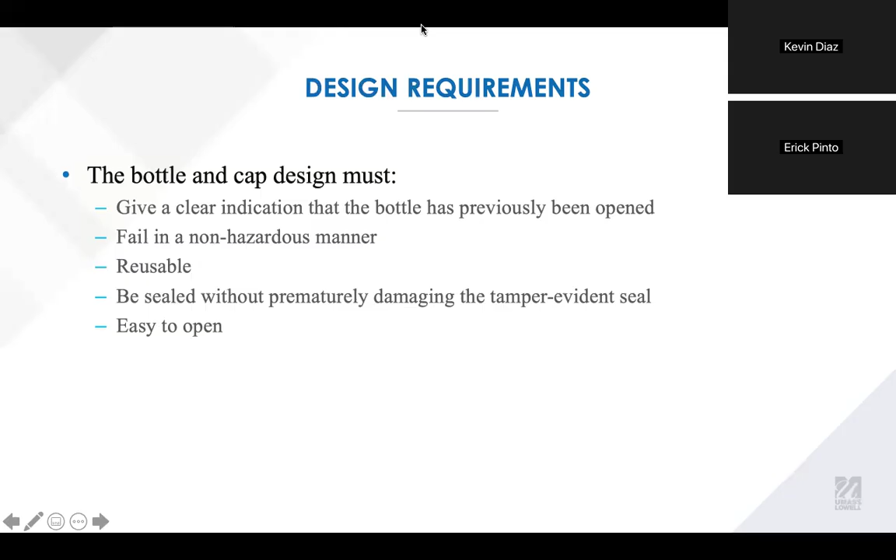Yeah, so for our engineering considerations, we wanted the bracket to fail in a brittle manner. We didn't want it to be ductile and have it deform before breaking. We just wanted a fast and clean break. So brittle materials and brittle failure would achieve that.

And we considered how it was going to break, and we figured out that having it fail by twisting would be easier for the user to open the bottle. It also prevents a lot of minor forces that could be exerted on the bracket from breaking it prematurely. And we used stress concentrations to figure out where the break would happen, so just to isolate it, basically.

And we considered how we were going to manufacture it. For prototyping, we chose 3D printing just to be able to correct the designs and go through prototypes really fast. And later we'll probably use blow molding for mass production.

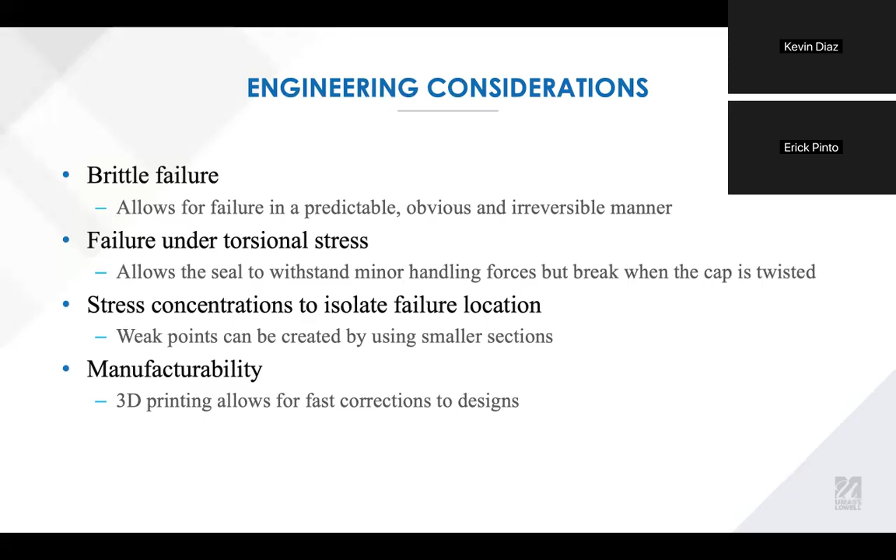For the proposed design concept, we decided to prototype a portion of the bottle, which is the body with the thread and the cap. The cap is made of a ratchet wheel, and the body has an attached bracket. The idea is the cap is gonna turn and it's gonna activate the bracket, twisting it until it breaks, as my partner said before.

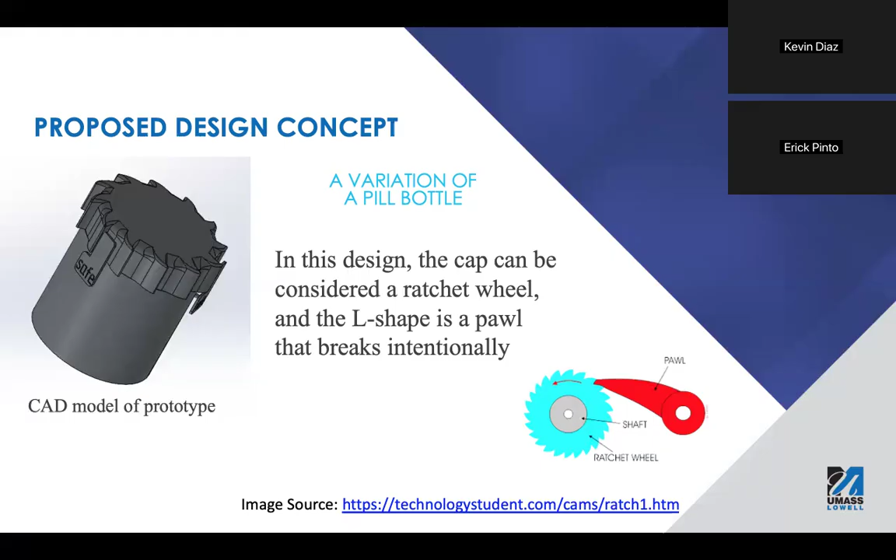That's our proposed design, as you can see in the picture. And the main concept is the ratchet with an L shape. Yeah, this is the engineering drawing. The cap is essentially a gear, and there's a little bracket connected that has the word safe on it. So when that breaks, it'll indicate that it has been opened before.

And right here, that's where the bracket connects to the bottle, and the connection between the little connector to the bottle and the bracket is where the failure will occur, because it's a smaller section. It tapers off a little bit, just to make sure it breaks off cleanly. Yeah.

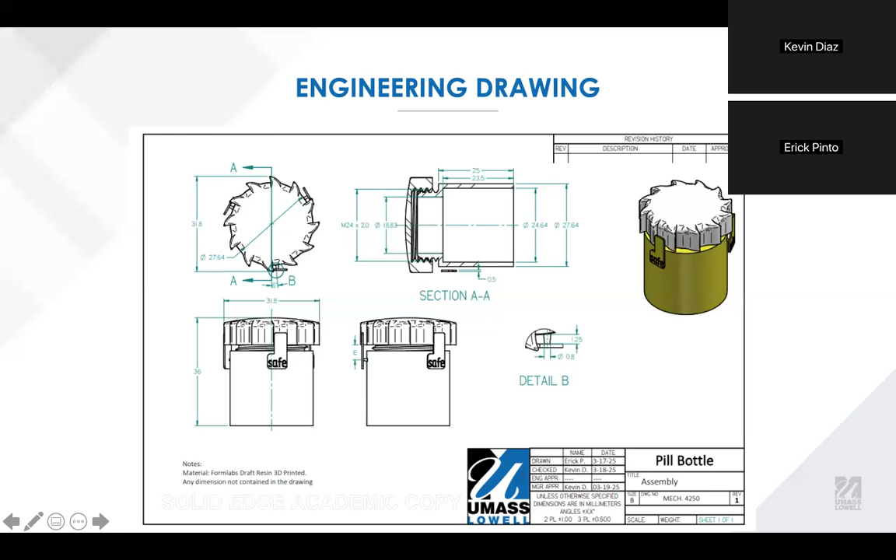Oh, prototype, okay. Go ahead. For the prototyping plan, we first wanted to figure out what material we're going to use. Initially, we're just going to use draft resin for 3D modeling and printing. But later we'll use regular plastics that would be used for pill bottles.

So probably polypropylene for the bottle because it's lightweight and chemical resistant, and polyethylene for the cap because most stuff is made out of that and it's cheap, and acrylic for the L-shaped bracket and the little connector to the base, because acrylics are brittle, so it'll make sure that we get the break that we want.

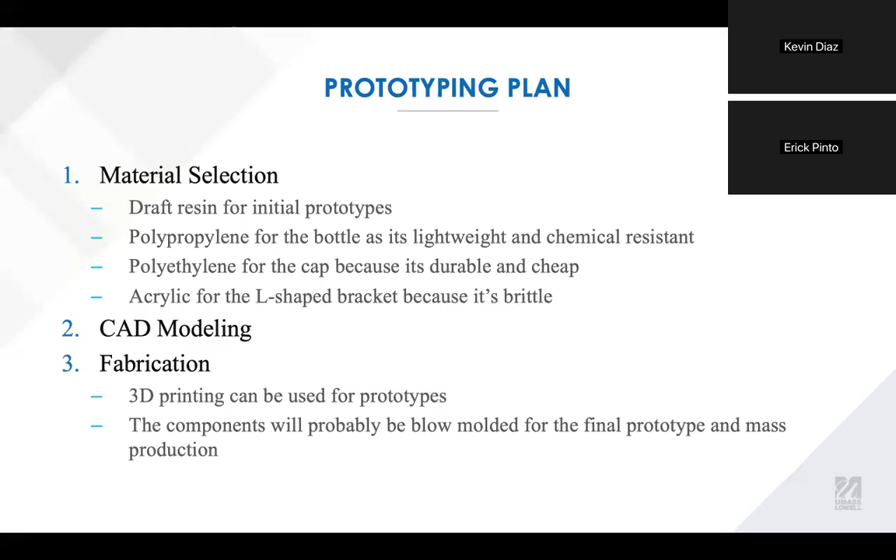So after we figure out the material, we go into the CAD modeling and just design it initially, and then make little changes, and then print it. We'll create the prototype by 3D printing and then by blow molding after.

The assembly is just putting it together and then putting the cap on basically, and then making sure that the bracket doesn't break when we're putting the cap on. And then testing is essentially the same thing. Just make sure that the bracket doesn't break beforehand, and then after we tested it, make sure it feels nice.

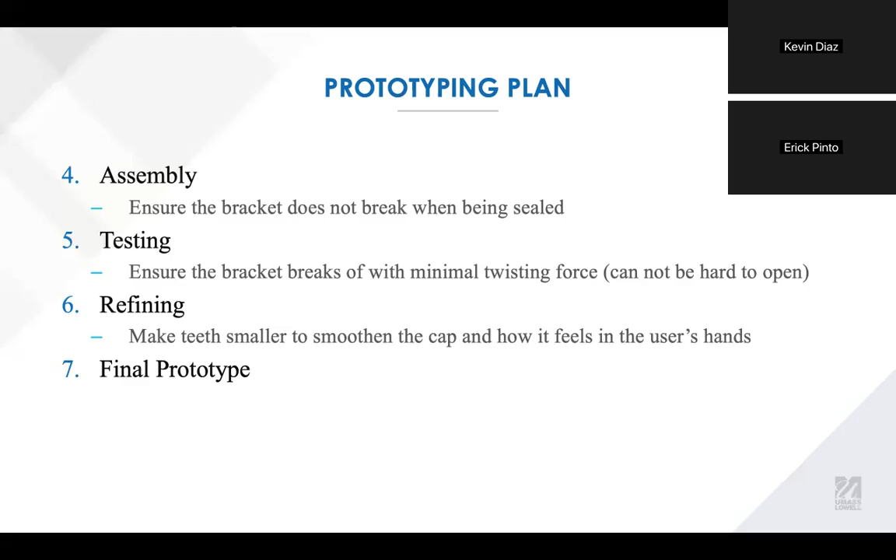We're just gonna refine the design. The thing I could see right now in the close future is making the teeth smaller so that the cap isn't as hard to open, or it could be just smoother in general, because right now it feels hard to open because of the teeth. And then after the refinement process, the final prototype will be delivered.

Testing and evaluation. Once we proved the prototype by simulating the closing of the bottle with the gear cap, we closed the bottle, and every time the cap makes a turn, it pushed away the bracket without breaking it. That's how we get to the end of the cap, sealing the bottle.

But once we proved that it went all the way down the bottle, we started testing the bracket failure, which happened when we tried to open the bottle because of the force exerted over the bracket by the cap.

When the bracket was off of the body, it left a small notch that is visible, and all three brackets fell from the body, which is an improvement we will have to work on for future prototypes.

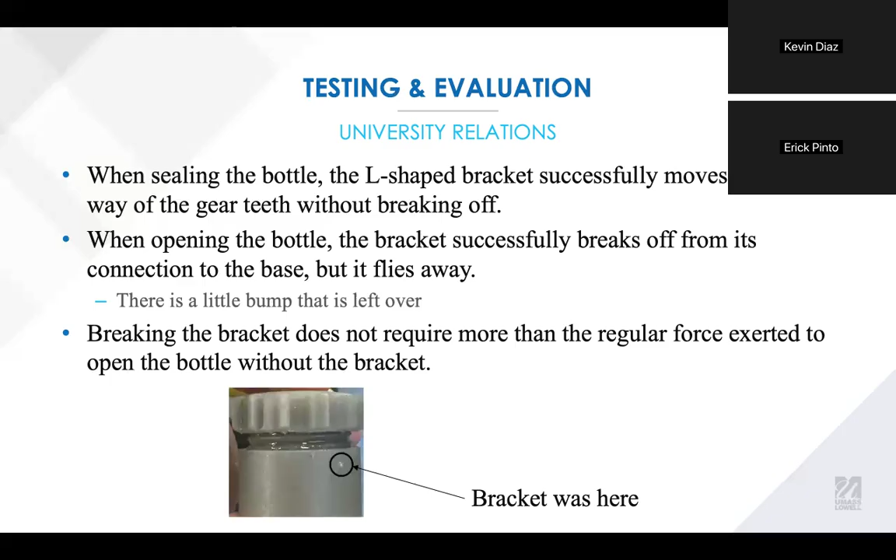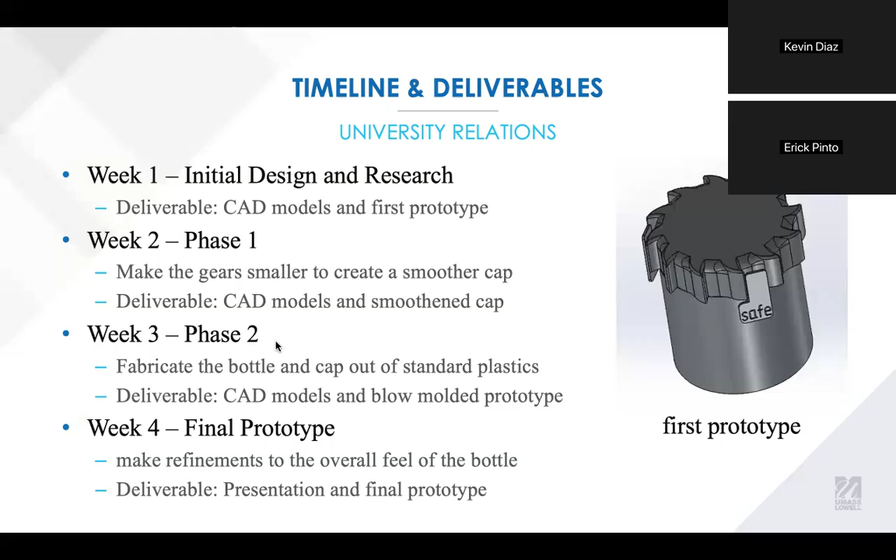After that, we'll probably move on to getting closer to the final product. So we wouldn't necessarily 3D print anymore; we'd start using the plastics for mass production. And week four, after making the standard plastic stuff, we'd deliver the final prototype. At each week there would be CAD models and a physical prototype delivered.